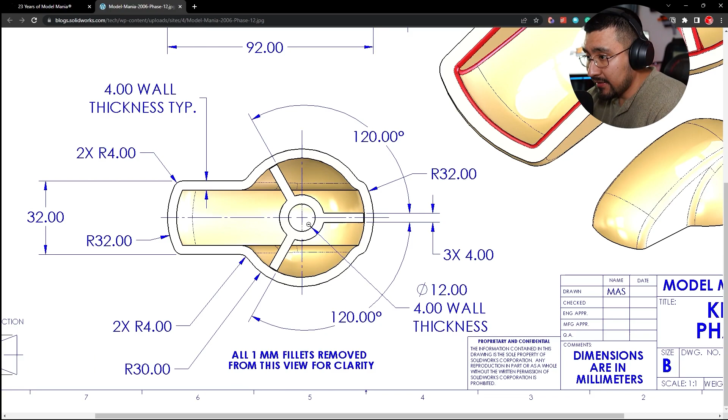Okay, I thought that was an offset rib for a bit. Okay, let's go and do this. I'm going to start with the sphere first, and that is R32. Going to go to my right plane, sketch a ball. Just to make sure our millimeters is right there. And we want this one, the radius, 32.

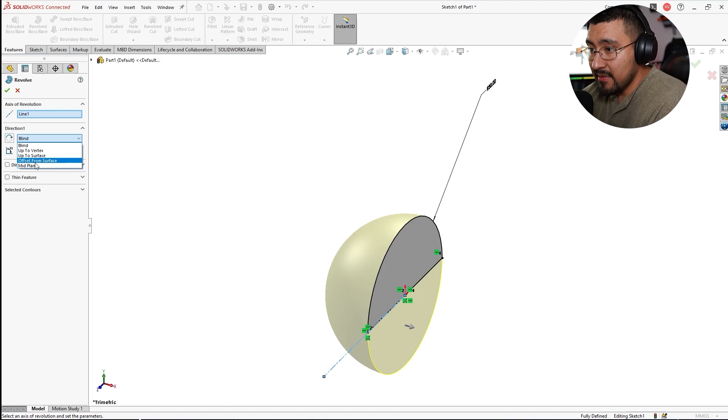Center line, point to point, trim, revolve. And I only want 180 degrees of that, about the midplane. There we go. Now I'm going to go to the right here.

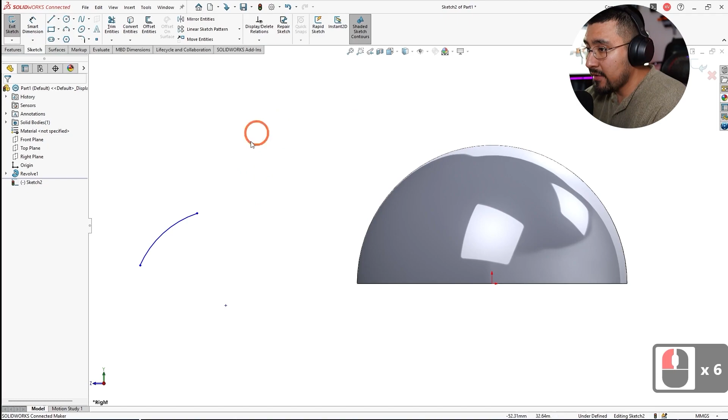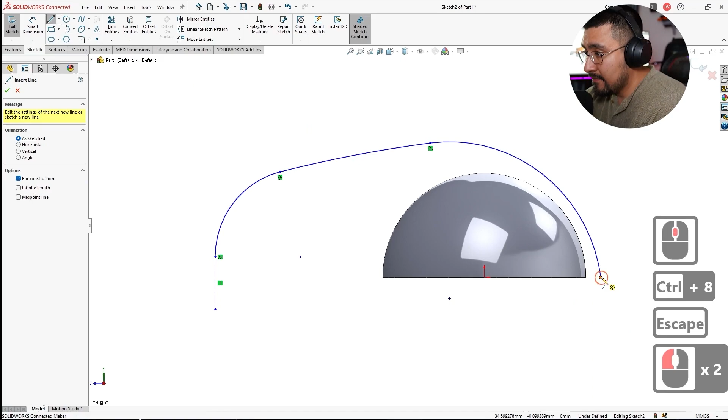And then another tangent arc here, goes back somewhere right here. I'm going to add some center lines just so I could add a tangency there. Tangent. Control 8. And another tangent here.

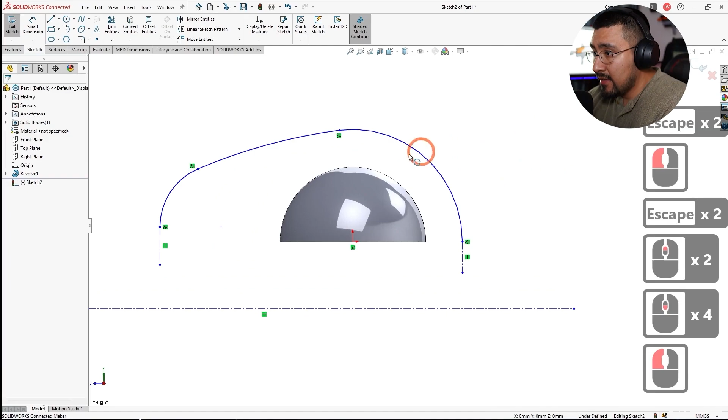Add a circular body here. I don't remember the exact radius of that, so this will be right here. And this one's going to be 32. This one is going to be 26, correct? 20. 92. Here we go, look at that.

Oh wait, that one I could easily put on another center line that's horizontal to the origin. And look at that, that's what I was worried about. Let me see, now this radius, they don't really define it here. And this center here, they don't really give it either. That might have constrained it, but I'm not entirely sure, I'll be honest.

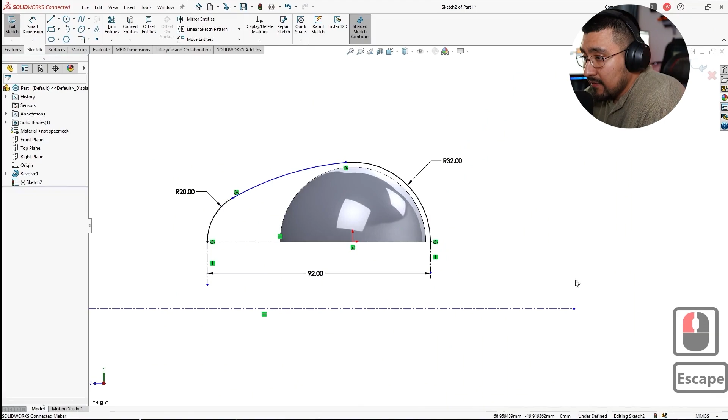And then it's a radius of 32, so this rotation is actually off the center. And then I'm going to bound it here, because all that is going to be the same radius as that. I'm going to continue onwards and see if I need the video later on. Maybe I find something. So, revolve. Do this center line right here. And we're going to do about midplane.

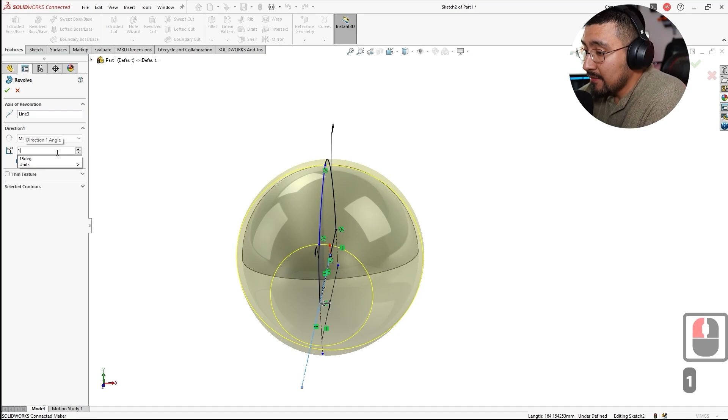And we're going to do 180. And what I'm going to do here is I'm actually not going to merge it, because I'm going to cut it. It almost looks like an egg.

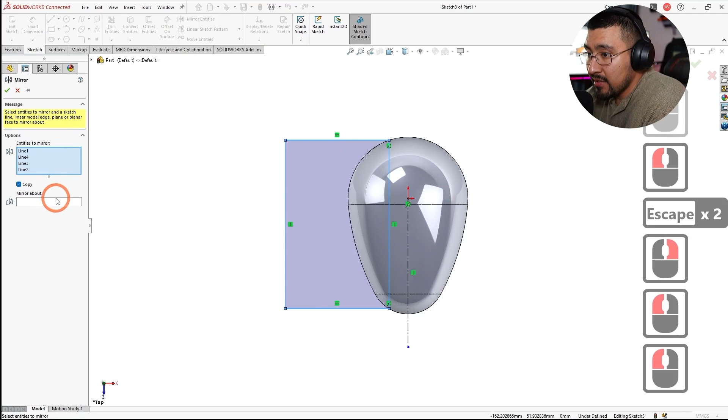Give constraints here. Make a center line. Select chain, mirror about the center line. Press OK.

Let's go ahead and do extrude cut through all, and just select that body. Oh, that is interesting, okay let's try this again. Move this up. Extrude cut through all, auto select. Switch the direction, press OK.

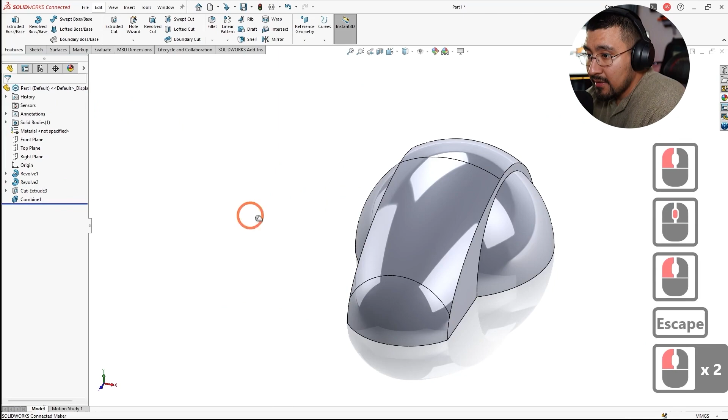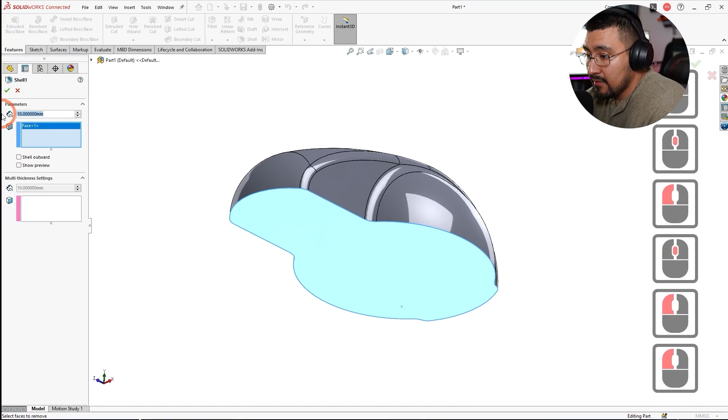Cool, now combine it, one right here, one right here, then another 4. There you go, let's do a shell. There we go, go to the top view here. Sketch a 12mm diameter hole.

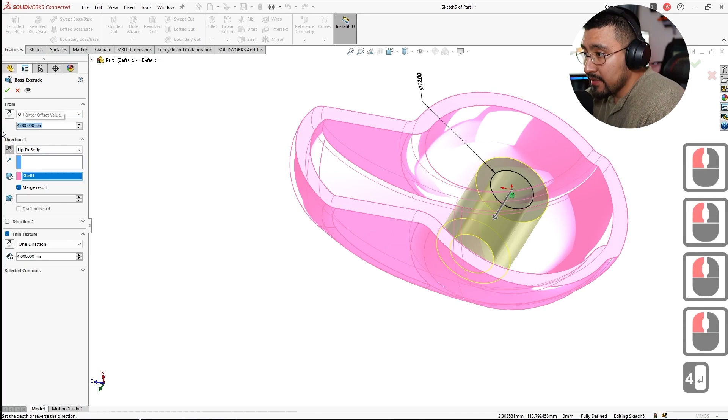Extrude boss up to body. And what we're going to do here is the thin feature. Do it at 4. And I believe there is like a, yeah, there we go. There's a 4mm difference, so we're going to do an offset here of 4mm in the opposite direction, and we're going to let them merge.

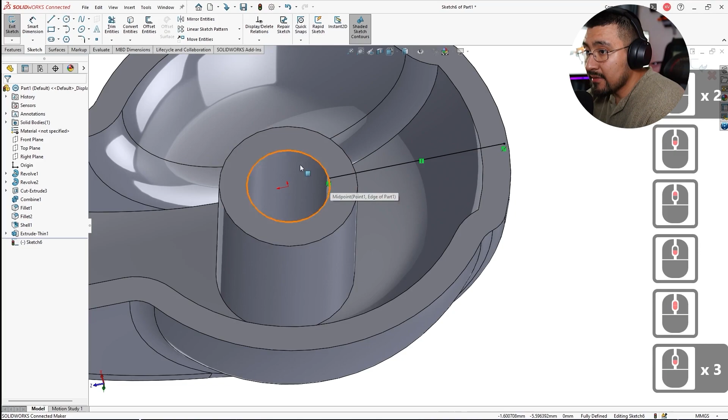Cool, now let's do the ribs. So I'm only going to sketch one rib, just like that. Don't go out here, just leave it in there. Do an extrude boss, mid plane, up to body. And it's going to automatically fill in everything that you need.

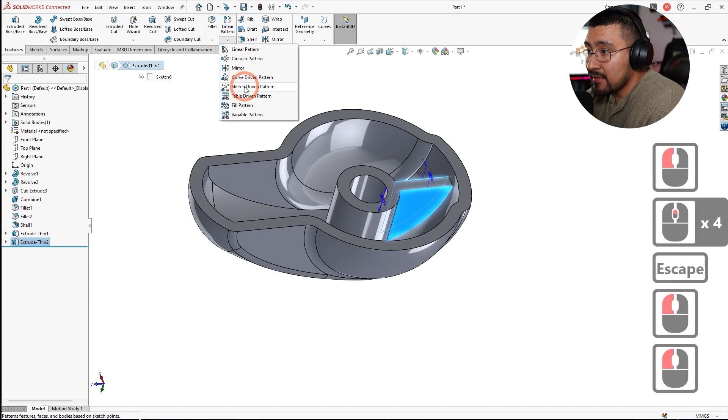Merge. And now this one, we're going to actually do a rotate, so a circular pattern. Grab the center of that, 120, and there's going to be 3 of them. And that's set to merge, I believe. There you go.

Oh, I haven't saved this entire time, so let me save it. Let's call this Model Mania 2006.

Cool, let me see what else are we missing. So the little tiny radiuses on the inside—we'll do that shortly.

And I still don't have this R defined. I wonder if they gave that out during the show, which I'm going to have to look at, maybe their drawings, to see how they did that.

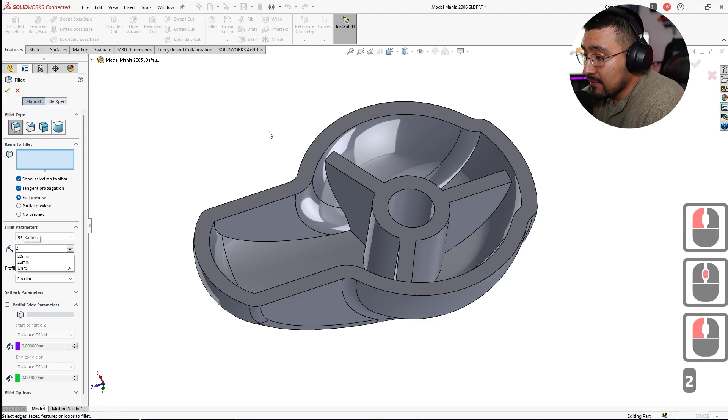But let's first do the 2mm. 2mm, right? I believe this isn't actually—let me check. Yeah, it's the entire face on top, so basically I could click all the surfaces. And this one didn't click.

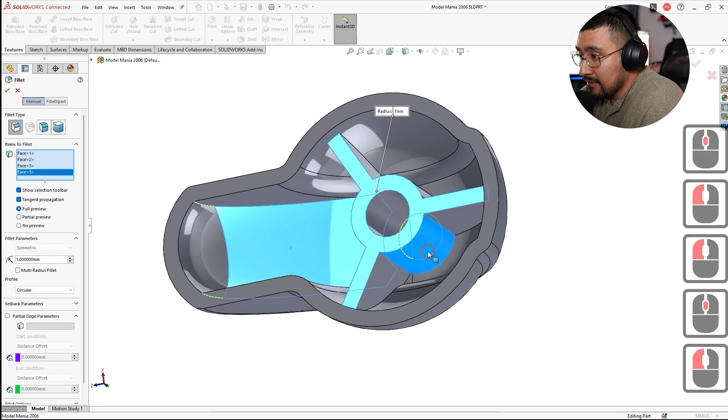I wonder if it's because it's too complicated. I might have to do it in 2 phases. Oh, this one did all that—sounds pretty good. Might be this one right here. There we go.

Select all the radiuses I can. I could probably just click this entire face, yeah. Nope, can't click that one. Here we go.

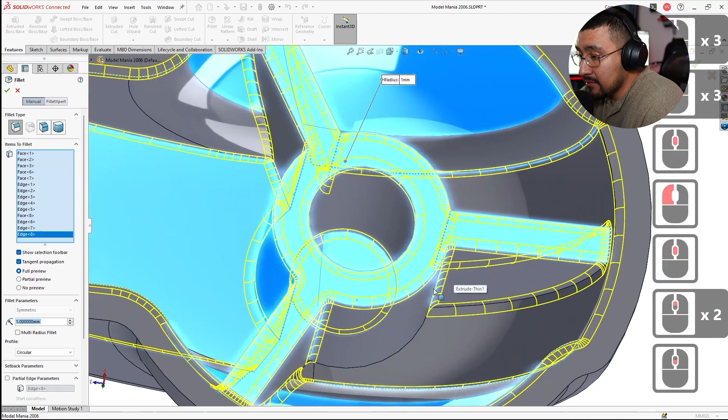Make sure to click all the same faces I am right now, just so you get a nice transition of all the fillets. Let's do another one about this face and this face—those are the only two that were missing.

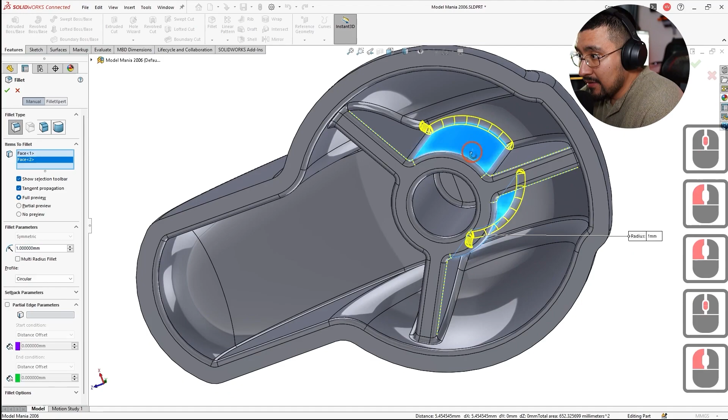Okay cool, grab those two fillets. We're going to color code them to the red color, and then we're going to change the entire color to that yellow color. Oh, that's not what I wanted. Add color, yellow—there you go.

I'm going to hit save there. Cool. Think I got all of them. Yeah, looks about right.

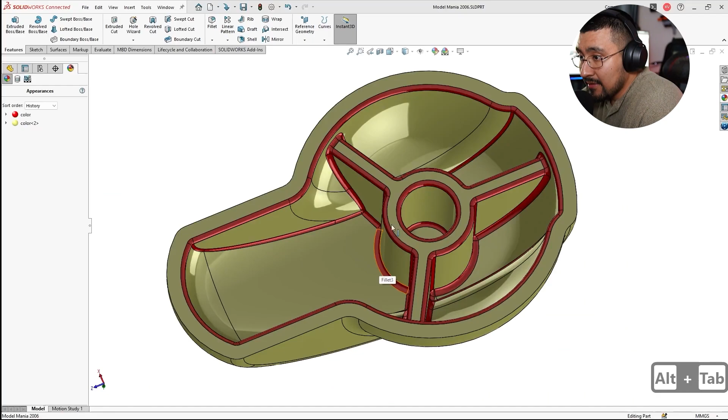And I still don't have a definition for this radius up here. I'm going to take away that for reflection. Go to save.

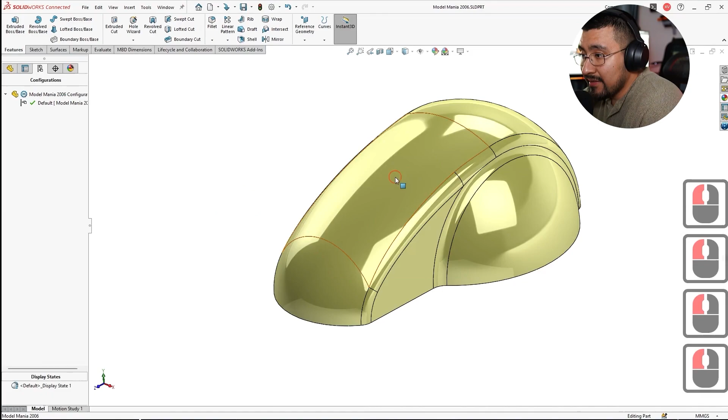Let me check out their solution for this part. Ah, I see what they did. It didn't matter—I didn't have to see the whole video to understand; I knew what he did already. So we're going to go to this.

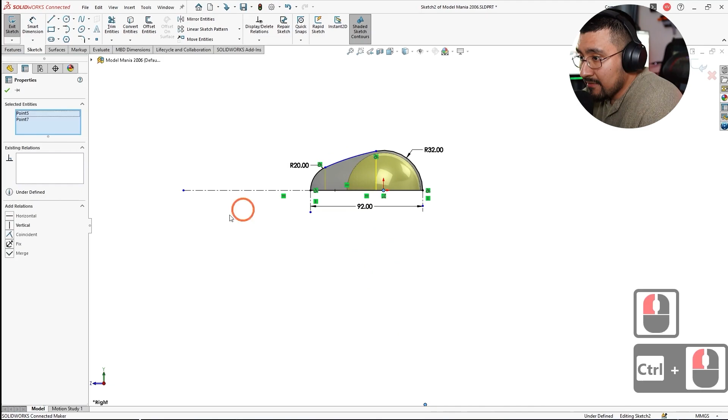And what they didn't clarify, I find this right here. It's at this center. There we go, it's going to be right here, I believe. Let's make this point vertical to this point—that's what defined this radius. No, they don't really show it that I know of.

To be honest, that's kind of not fair, but it is what it is. So there we go. I wish they colored these—that would have been cool.

Okay, now with all these parts, they all have two phases. So let's go here, and we're going to go to phase 2, and check out what's phase 2: make changes as indicated in section AA.

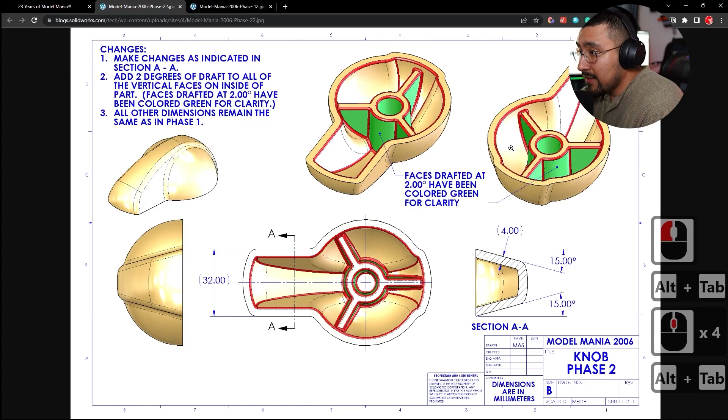So all these, okay, we're going to change this name to phase 1. Add another configuration, call it phase 2. And then what I'm going to do here is roll up the fillets.

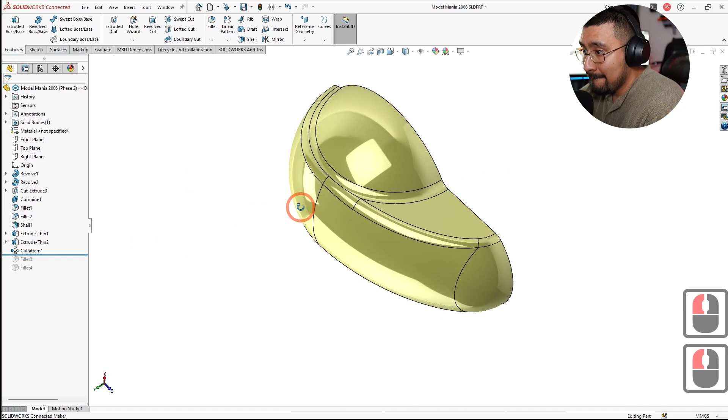Does it get the ones on the outside too? No, so I'm going to have to roll up above those as well. And for this first draft, let's click this bottom. The direction of the draft is up—the way your piece comes out of the tool, that's the direction.

It's at 15 degrees, right? 15 degrees, draft that base, press OK. Now we can scroll down—that handles that.

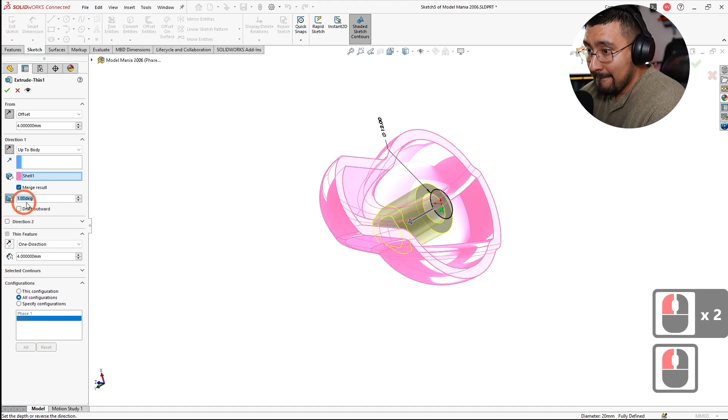This shell right there, that's center. So this center piece is now going to be drafted by 2 degrees, and this is draft outwards. Let me see if the hole—yes, the hole on the inside's also drafted. Pretty cool.

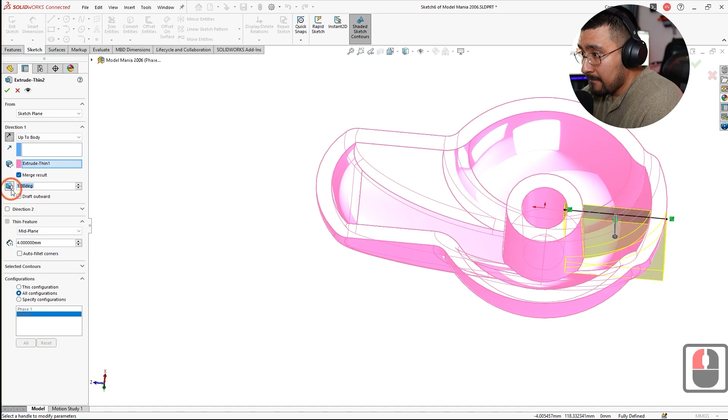And then we're going to do up to body right there, and we're going to do this one. We're going to actually draft this one out as well, 2 degrees. And you see that right there?

Let's see if it actually does that. I don't think so, but we'll see. Haha, it does. So I might modify this—oops, I want to draft outwards.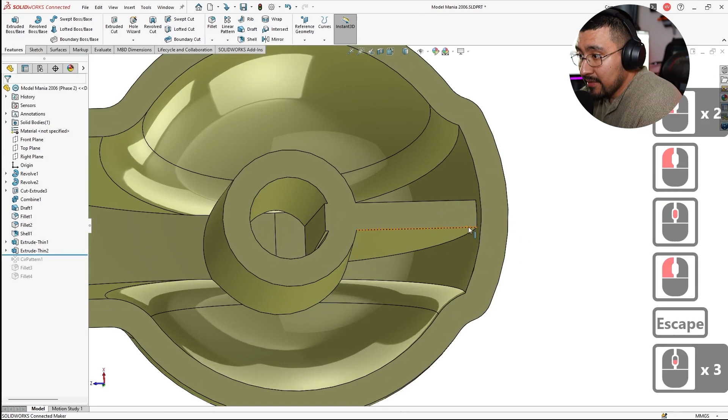And there we go, let me see. What can I do there in order to make this correct? Ah, because it's right there—that's why.

So I'm actually going to do these ribs in a different way. I'm going to scroll up, and I still want the fin part. I'm actually going to go to the rib feature.

Select this plane, I'm going to sketch the same kind of line, go all the way out here. I'm going to exit my sketch, and it's going to give me a rib feature.

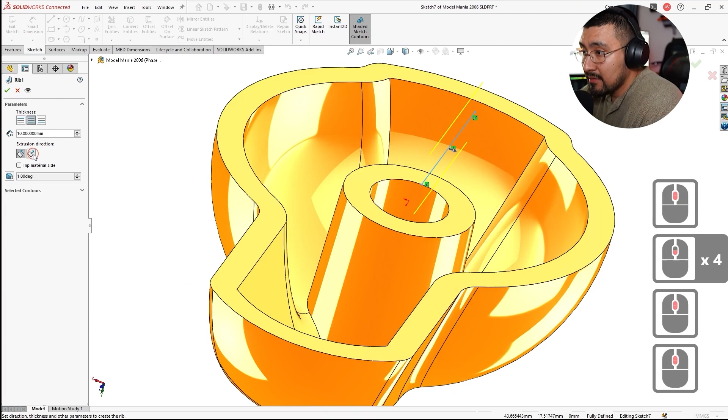So the thickness of this rib—let me change the direction, it's going down, so these are to the side, this one's going down. The rib feature, I actually forgot how much it is—4 millimeters wide. And then this one's going to have a draft of 2 degrees.

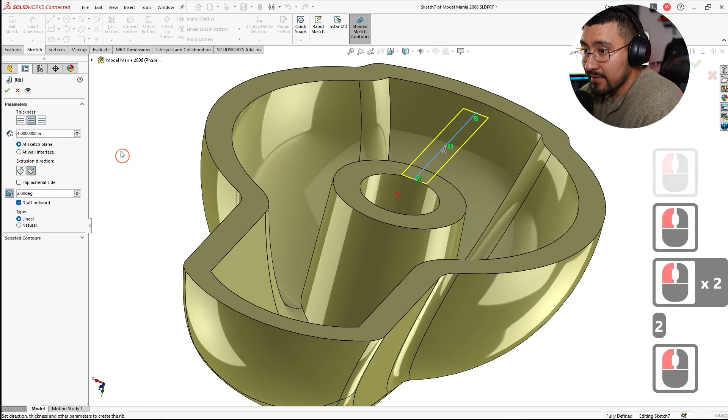2 degrees outwards, and it's going to be a centered rib. And there we go. So that makes it a whole lot easier with the rib feature rather than the extrude thin.

Which I'm going to now delete, the thin. I'm going to click advanced so it doesn't delete all of it. Press OK. Oops, I did not want that delete. Let's try that one more time. Delete. And then I'm going to select these.

I'm not going to delete all these. I'll let that delete, and I'm going to fix these features. I'm going to delete this sketch. I don't need it anymore.

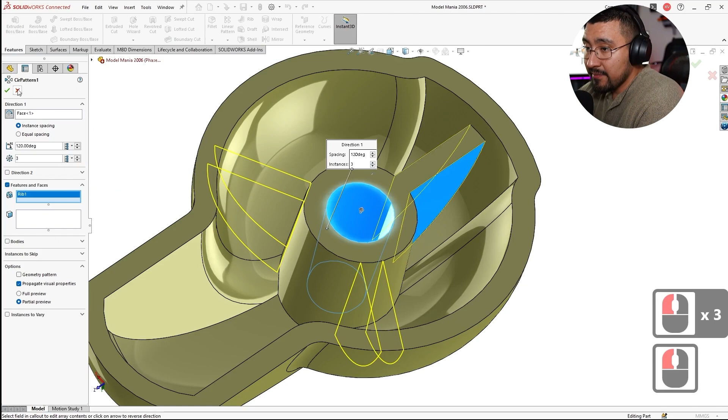Click the circular pattern. I'm going to click the new feature, which is that rib tool. Press OK. Now it creates the other ribs. And now this fillet also needs to be fixed. So this one right here.

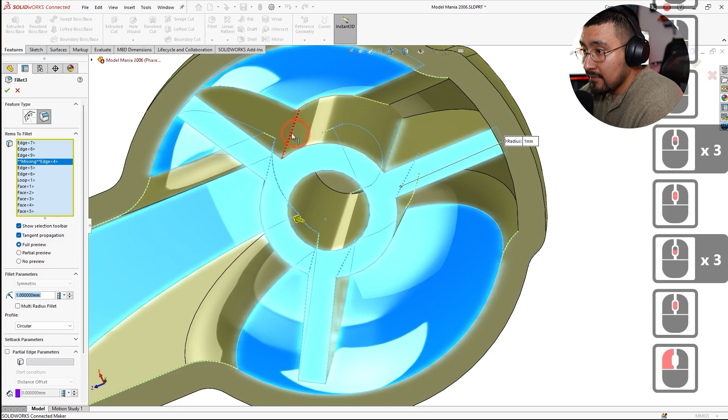So I'm missing now the vertical walls. There we go. And there's a lot of geometry missing.

Let me see. Let's see if I could fix this in a fast way. I don't think fast, but let me try reselecting everything.

Select all the walls first. There we go. You see, it might be down here. I might have to select these first. Yeah.

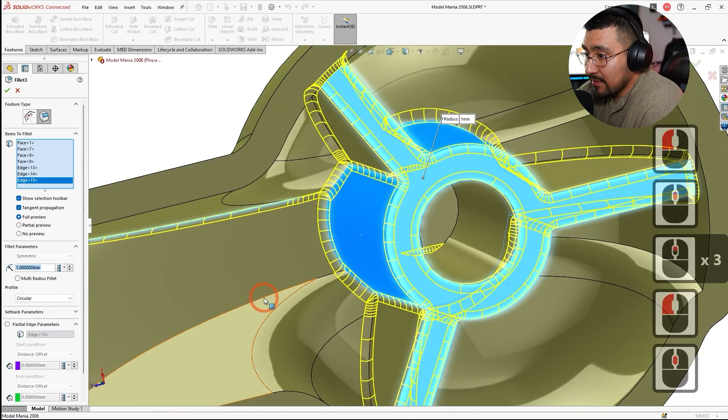And then these outside arches. There we go. That makes it nice right there. And I think that connects everything.

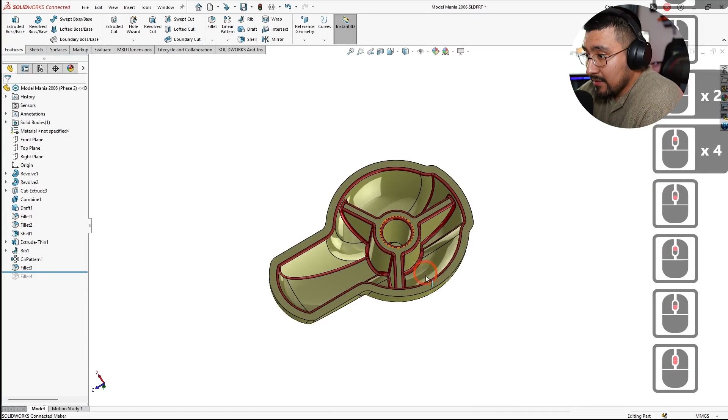The only thing is, after I let this go, I'm going to have to redo it in the other phase 1. There we go. Let me make sure I got everything. Looks right. Let me save it.

And there's one more of these. Oh, I did it in 2 phases, huh? Let's delete it. Let's see if we can get away with 1 fillet. And then the draft phase.

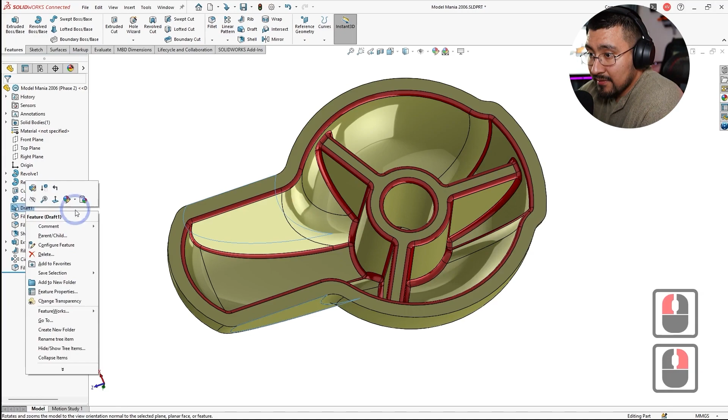I'm going to click my draft. My draft. Does it color code it green? It doesn't. But I'm going to select these as well.

Select all the faces here just so I could color code them green. And there's no easy way to do that, honestly. Face. Green.

Cool, save it. And then we're going to see how much destruction I did in phase 1. Rebuild. And then right here is going to be where the destruction is at. So the drafts are gone and the ribs are gone.

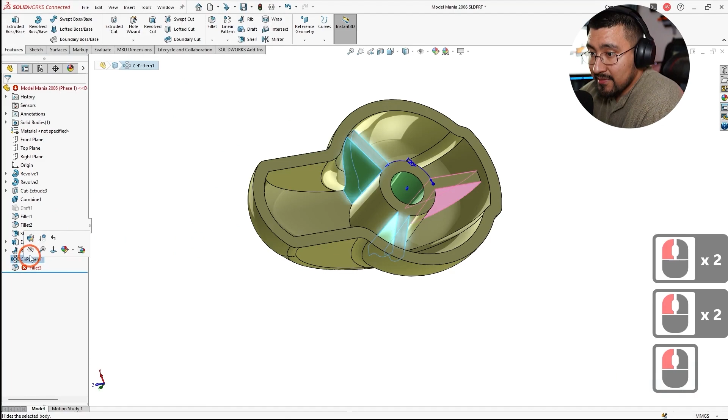So let me unsuppress the ribs. And then this one facing downwards. We're going to, right here in all configurations, we're going to select this configuration. And we're going to just put it to 0.

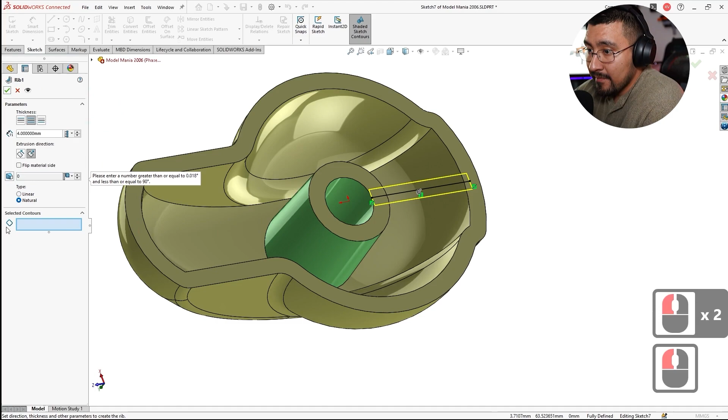Actually, can I just remove it for this one? I think so. And then this selected contour is going to be that sketch. There we go.

And then the extrude thin, it's going to be for this configuration. So this configuration, and I'm going to remove the draft. Nice.

Now the radiuses here also flipped out. Yep. So I got to make the radiuses work for both configurations.

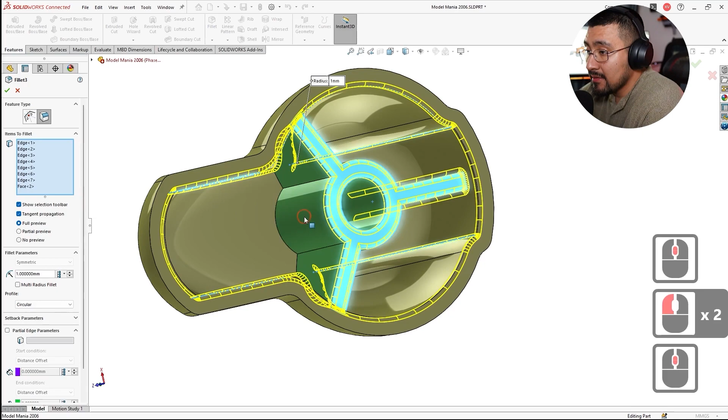So there's that face. See, that's the face that's not going to like so much. Here to here works, over there works. Right there, that line is what's going to give me a headache.

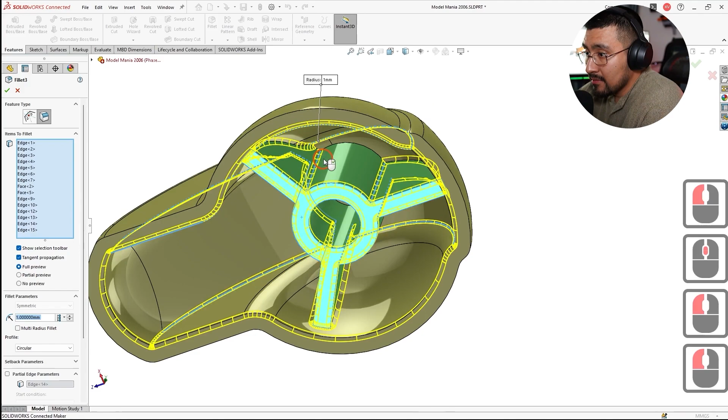There we go. And I'm going to add another radius for this edge right here. And then we're going to color code this as well, red. Boom, it grabs all the same edges.

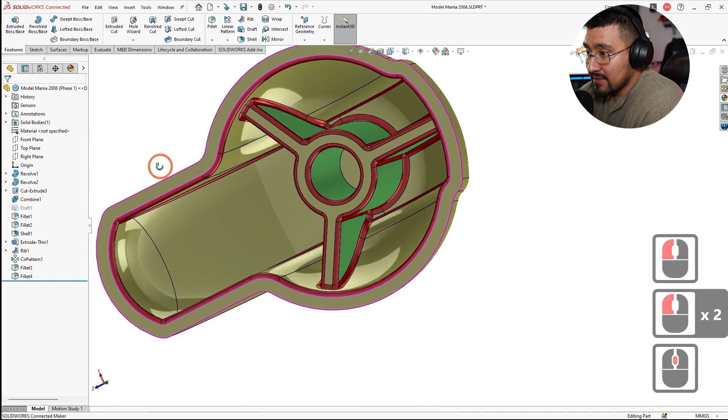Now let's switch between the configurations. And this is where this one is going to break again. So I'm just going to press OK. Let them all break. Press yes.

Unsuppress the one that we just made. Cool. And I may have to make a third one just so I could. There we go. Just so I could grab every single edge.

But right here, you see that? That's what I'm trying to avoid. It's not a nice radius. It's better if it flows this way, and it looks all nicer too.

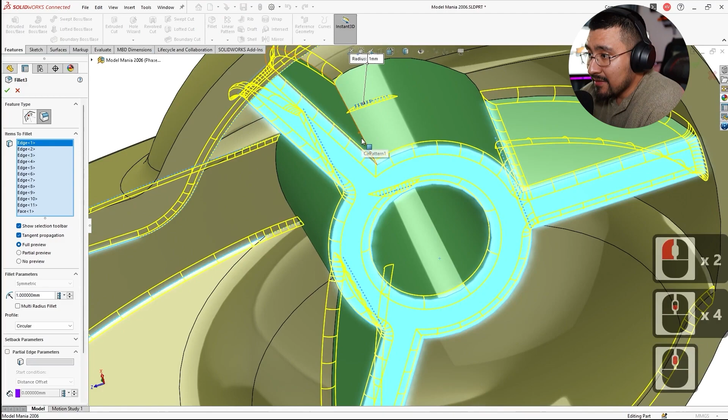So let's try to get that, try to get that nice radius. Now, I believe I could grab this edge without problems. Yes, and grab this edge with no problems.

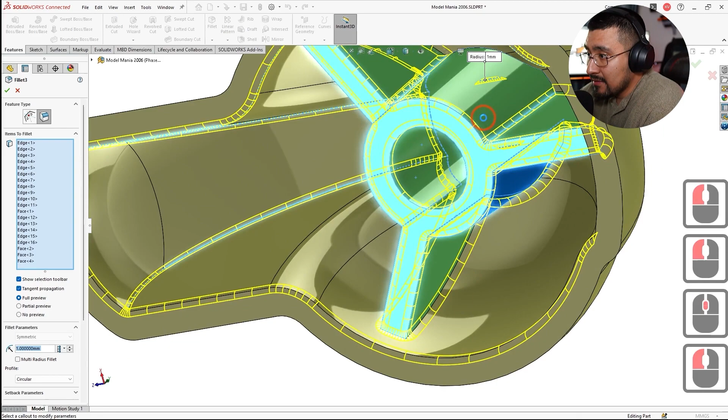And let's try to see how much I could grab before it starts breaking the configuration. I could probably just grab this entire face. Can I grab this entire face? Yes. See, I couldn't grab these two faces in the other version.

But I could grab here, this edge, and this edge, and that might be okay for that additional radius to come in and clean it all up. There we go. And let's not forget the inside.

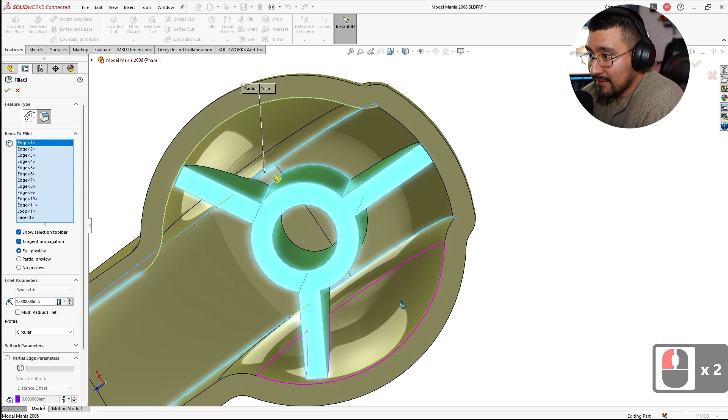Okay, let's see. And I still don't got it. Let's see, what radius did it not like this time? It's most likely these. Nope, it wasn't those actually.

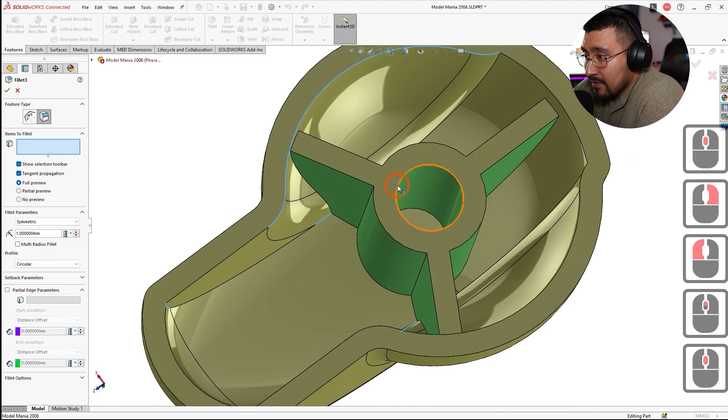Now I had to break it up to smaller radiuses, just little groups, which I don't like doing. I like keeping it all in the same radius group. So I'm gonna select this top base first and all the sides. Then that'll be one radius group.

Second radius group. Actually, I could probably do that as well. I could probably get away with that, grabbing the inside here. Let me just scroll this up and see how these two radius groups act.

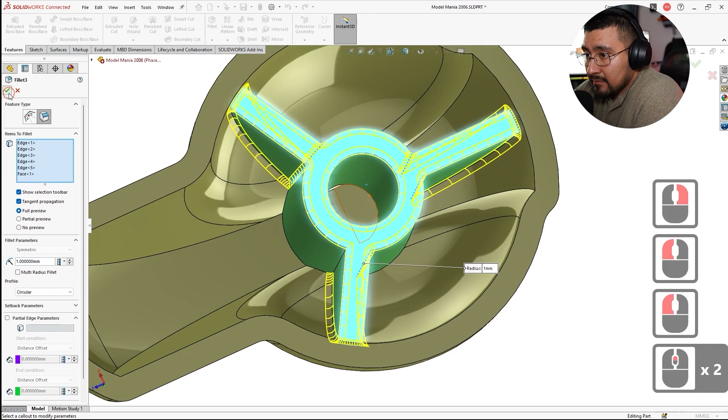And it doesn't like it. It's that inside. So I'm going to go back to this radius group. And then I think this radius group could also handle these here.

Now you see that though? I'm working between the two configurations in order to get them as similar as possible to each other.

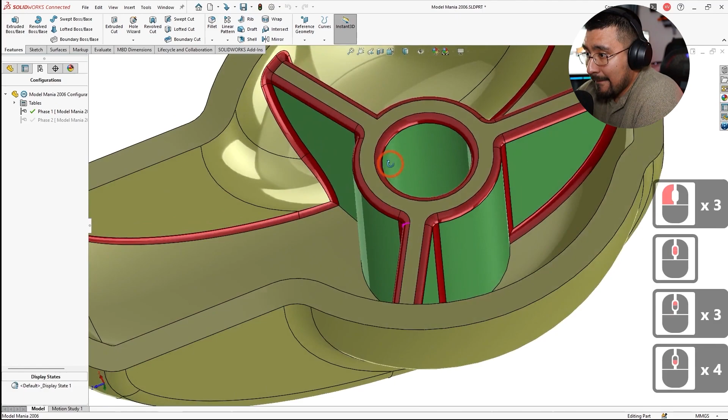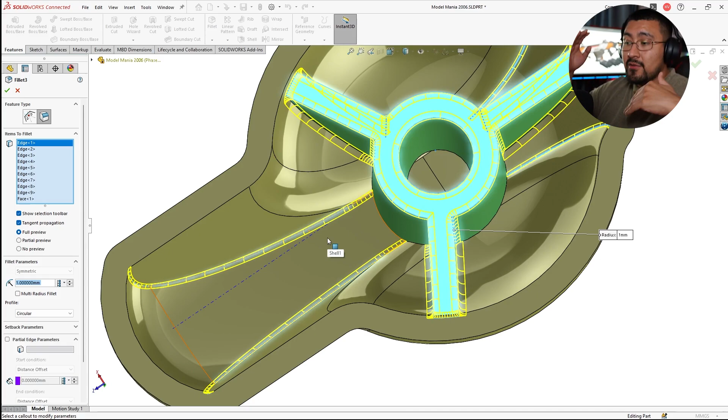This is how you want most of your models as you're trying to make changes for your workplace or for yourself, to have the configurations be able to configure between the two of them easily. So that's just good design intent.

I think these two I could do as well. Let's see, can I grab this entire... there we go, that. That allows me to drive the entire thing between the two of them. Yes, it does. That's good. Nice.

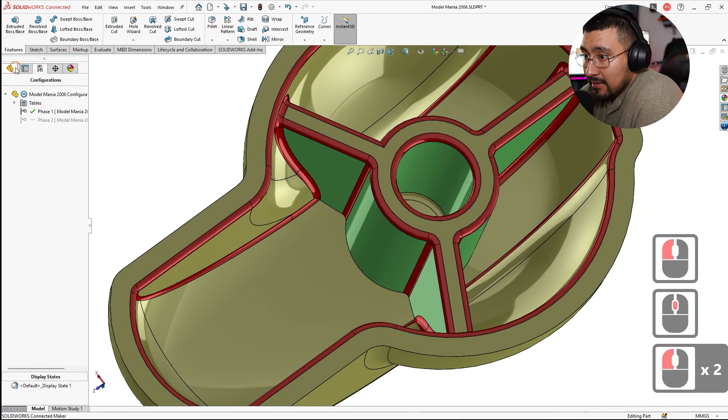Okay, now I could drive this radius down here. And then between this configuration, I might have to have a different radius there. That's fine, just for this small area here. Now when I go to the other configuration, it's not really there.

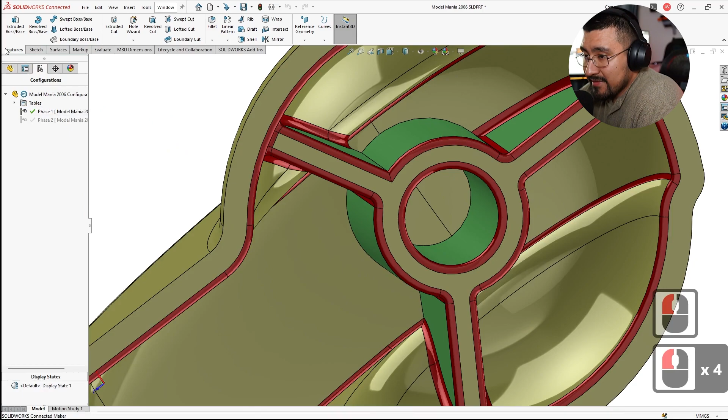Suppress now. Let me change the color of this radius. And then the 6, unsuppress it, it's going to create that circle. Change this one to also red. Then this last one, number 4, it's going to clean up all the edges for me.

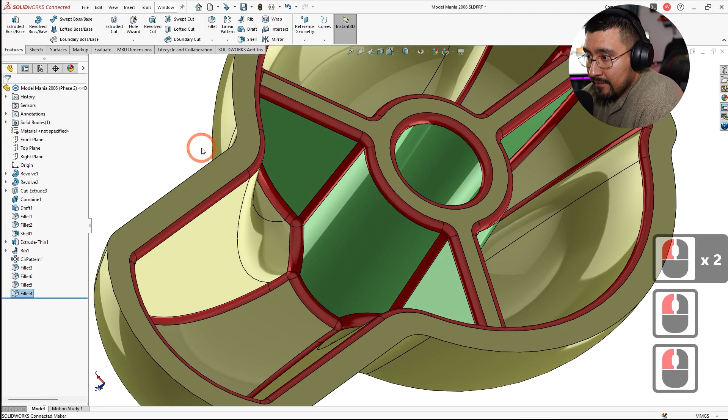There we go. Actually, this one I could grab this edge right here, and number 4 could finish it up here. Hit save. That should work between the two of them. Oh, no, never mind, I was wrong.

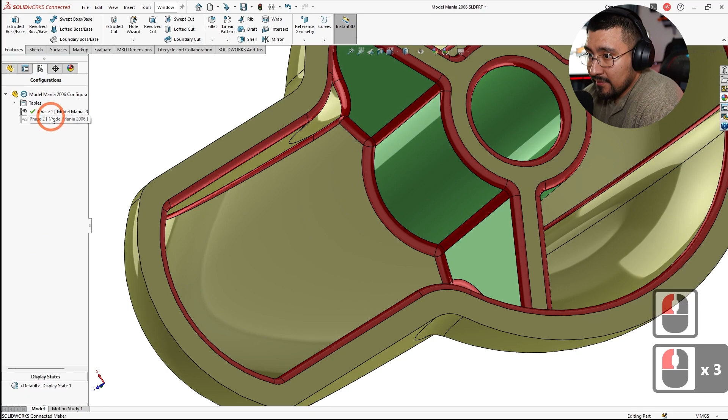There's this edge still. Boo-hoo. Which I could probably grab that face. Let's see if it works between the two of them. Why does it want to grab this edge for? I mean that face.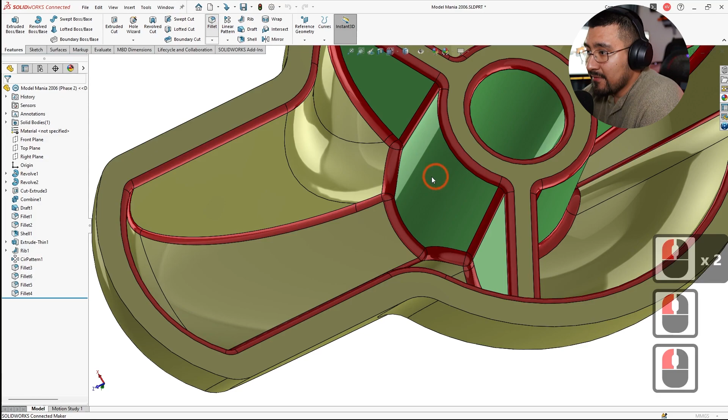Okay, so it just needs to be another face. I don't know why it doesn't want to work between the two of them. It keeps on switching it, which is fine. That one, radius, 1 millimeter radius. Right click. Fillets - better practice is to keep them as minimal as possible, but if you need it, you need it.

Okay, so now I got it configurable. There we go. Hopefully all the edges are there. Doesn't... maybe make sure. Looks good.

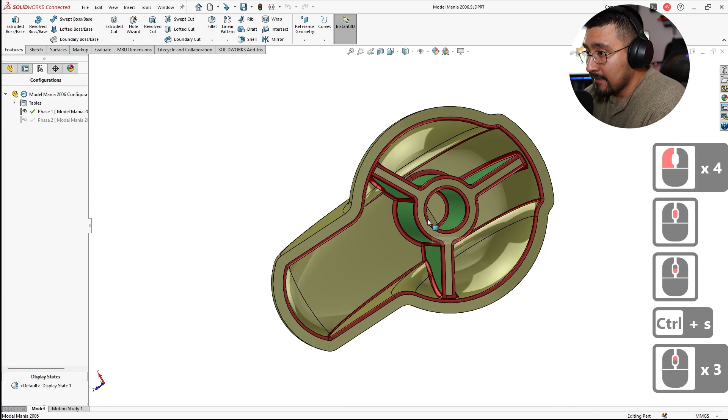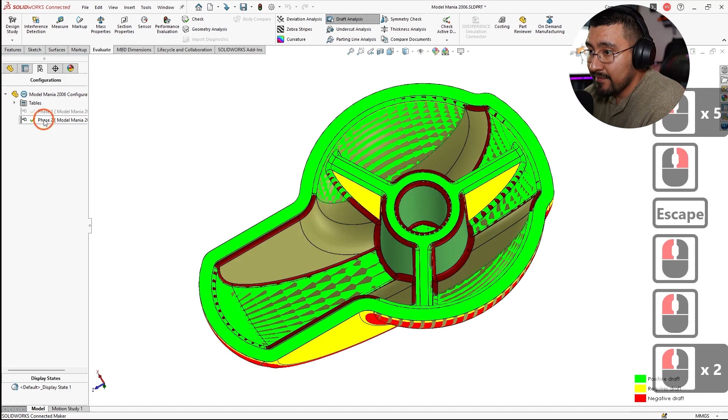And now we can do a draft analysis. So let's go to evaluate, draft analysis. And you can see there's 0 draft on these, which is what we want. And then we could switch it amongst the configurations. Oops, I need to exit out. Double click this configuration, and now you see.

And this is configuration 2. So we're gonna go right here to the rib. I know it disappeared. And we're gonna go to here, this configuration. Press OK.

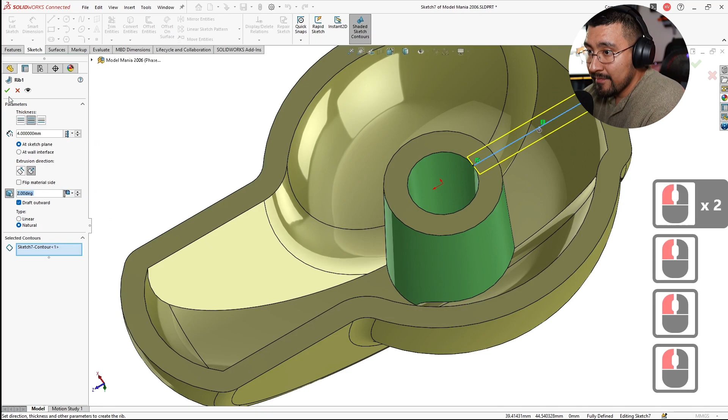And we're going to make sure the draft analysis works. I'm going to remove all the ribs first. Draft analysis - this is 0. Go to here, draft analysis, and now this is 2. Okay, now we have the drafts working.

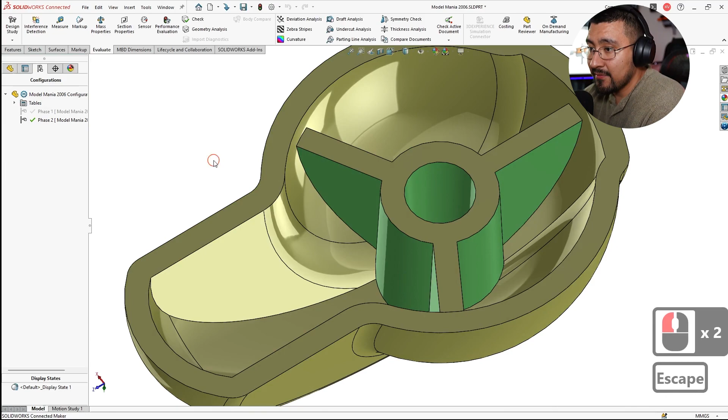Now I got to redo the fillets. So that solves that problem. That only works for that one. The radius down there. Let me grab these 2 faces. Nice.

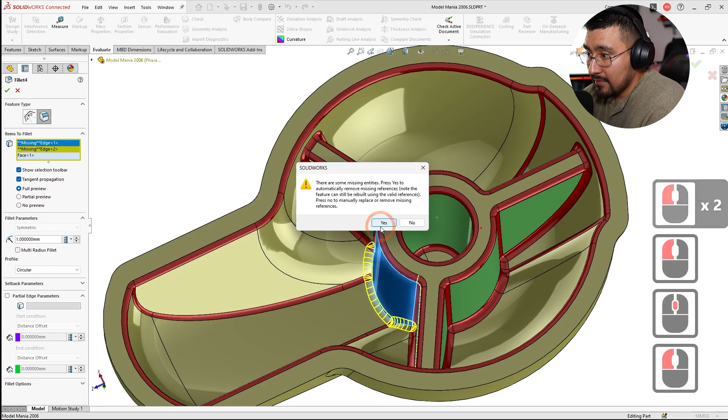Some of these are going to break. Let's press save, I think I got all the radiuses for phase 2. Let's go back to phase 1. And I'm missing 1 radius back here, and I can use this one to capture it.

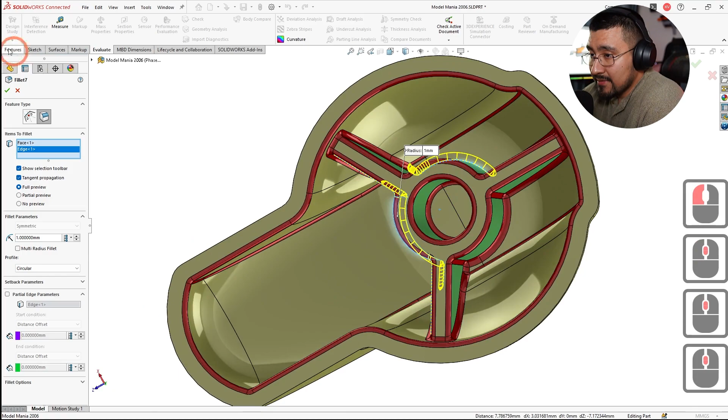I don't know why it doesn't select it in the other one. Let me see - ah, this is a radius on its own, that's why, and it's going to want to remove it out of this one. So I could probably capture all 3 of these radiuses at once, so I could delete this one and save myself the feature.

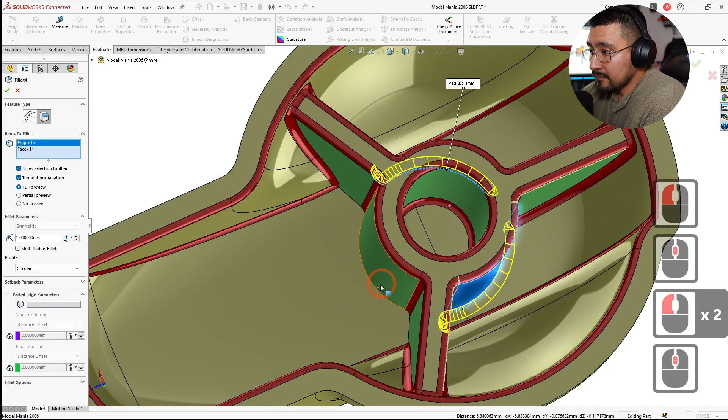There we go. Now what did I do now? There we go. And same thing, it doesn't want to consume the 3. What if I just select this wall? Maybe it'll translate nicely this time. Nope.

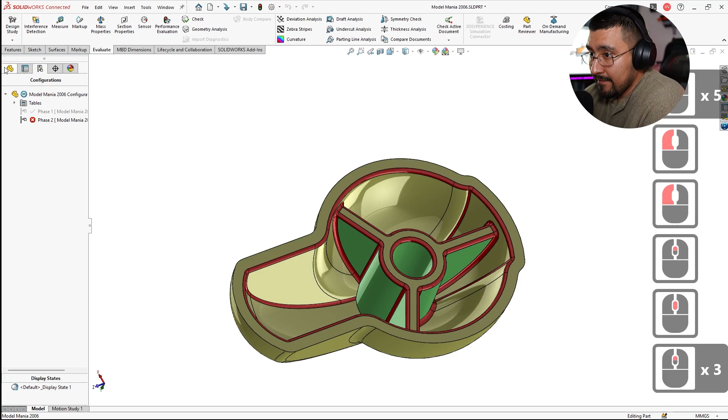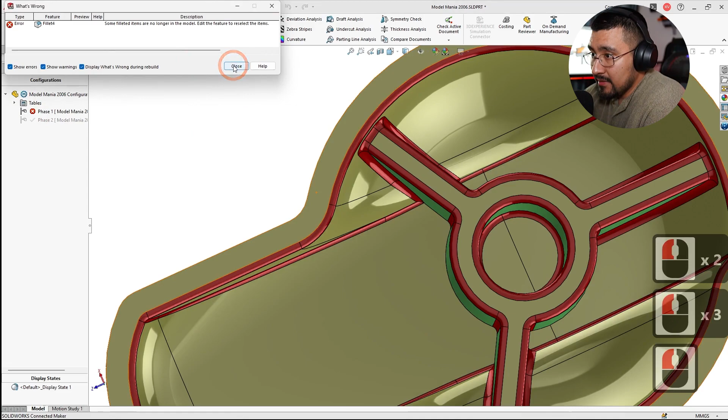This face keeps on hopping by itself. So when I select the faces, it changes on itself. So I'm just going to have to create different ones for each configuration. Rebuild. So I'm just going to suppress that one and create a new radius.

Here, here, and here. Right click, make it red. There we go, now it should work. There we go, save it.

And let's head over to the next one. Oh wait, before that, let's look at my mass properties so you guys can compare it. I'll compare it against the solution video as well. Hopefully you have the properties there.

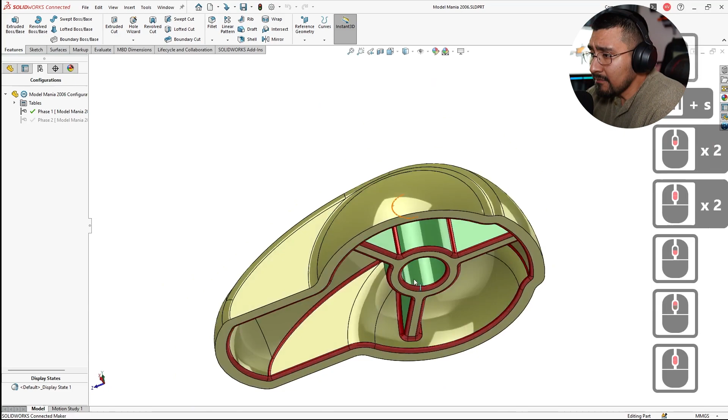So here we go, let's go to evaluate mass properties. And this is for phase 1, so you guys could look at these two numbers, compare them against yours. And then phase 2 mass properties - look at the two numbers and you guys compare it against yours.